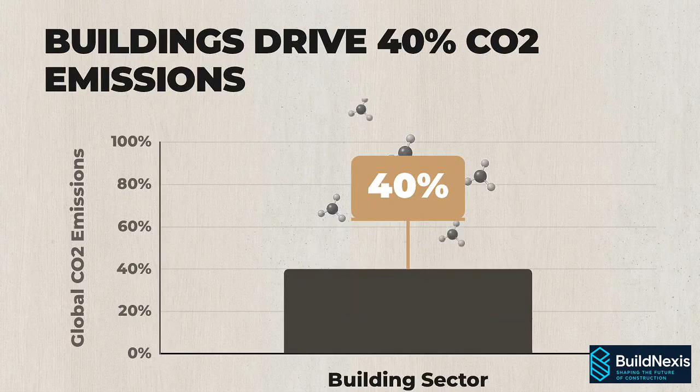The global building sector currently generates nearly 40% of energy-related CO2 emissions. To meet strict decarbonization targets by 2030, the industry is transitioning away from concrete dominance toward biogenic materials, specifically high-rise mass timber. Scaling timber structures up to 10 or 15 stories is a solved engineering problem.

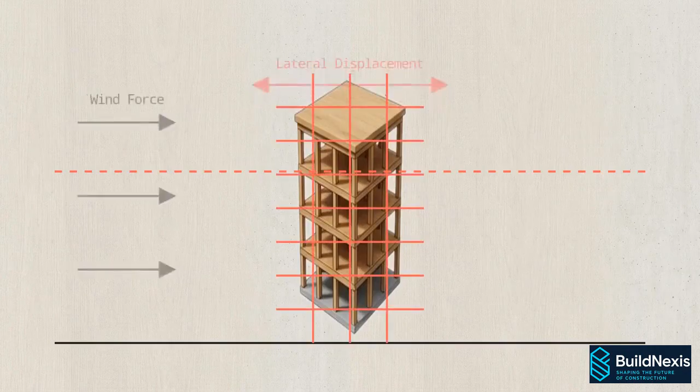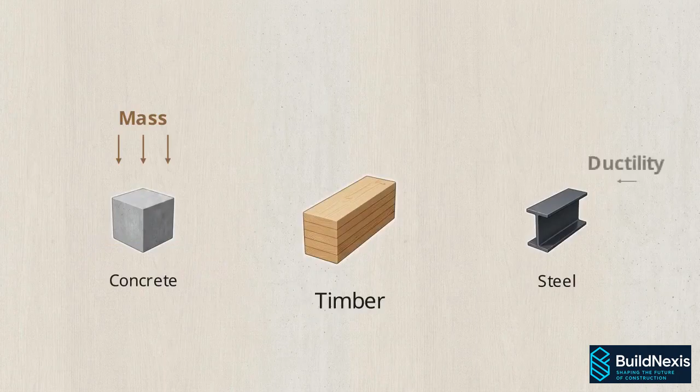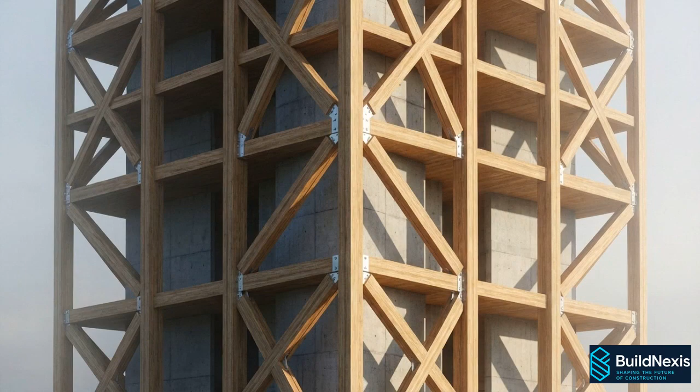However, pushing engineered wood past the 70-meter vertical threshold breaks standard structural assumptions. At these altitudes, engineers are constrained by the physical properties of wood. Timber lacks the extreme compressive mass of traditional concrete, and it does not possess the high ductility of steel. Reaching 80 meters and beyond requires abandoning pure timber topologies. Instead, structural engineers rely on highly optimized hybrid systems to manage forces that traditional wood framing cannot handle alone.

The 86.6-meter Ascent building in Milwaukee stands as the current height record for this hybrid approach. By utilizing approximately 7,200 cubic meters of engineered wood, the Ascent Tower acts as a massive carbon sink, sequestering roughly 7,200 metric tons of CO2 equivalents over its service life.

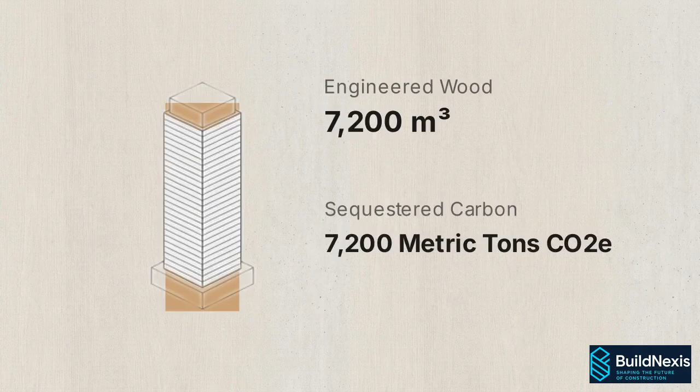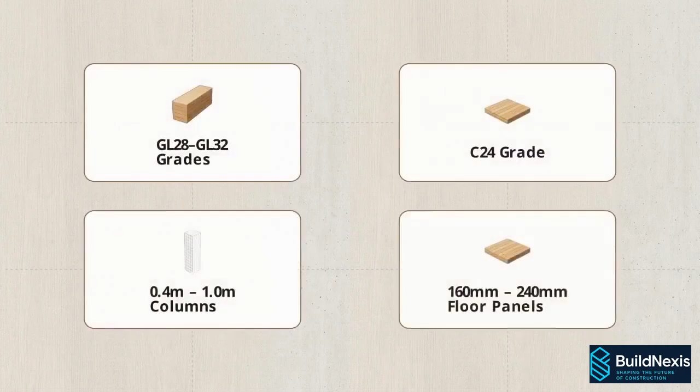In Norway, the 85.4-meter Mjøstårnet tower provides the primary structural counterexample to Ascent's design. These records are corroborated by other regional case studies, including the 84-meter HoHo Tower in Vienna and the 73-meter HAUT in Amsterdam. By dissecting the structural data from these specific towers, we can extract the new universal benchmarks for high-rise timber engineering. Sustainable density results from re-engineering how existing biogenic materials handle lateral loads and fire physics at extreme altitudes.

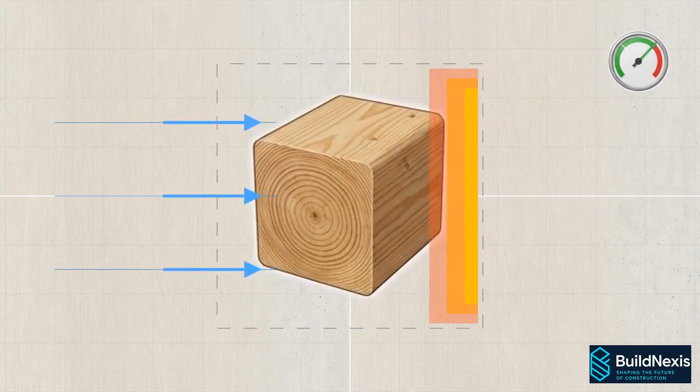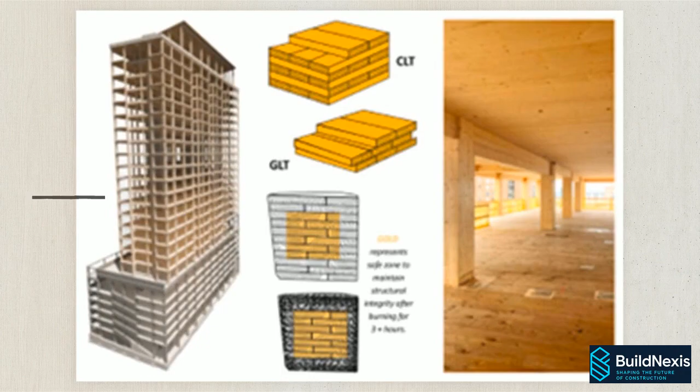The core aerodynamic problem with tall timber is a matter of mass. Wood's high strength-to-weight ratio allows it to perform exceptionally well in seismic events, but its low dead mass makes tall towers highly susceptible to severe wind-induced sway. Ascent's baseline solution identifies the dominant global model for tall wood, the hybrid RC timber system. In this model, gravity loads are handled by a glulam post and beam grid paired with one-way spanning CLT slabs.

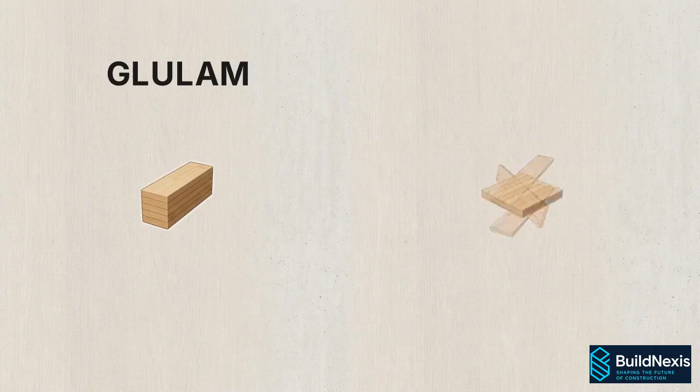Glulam, or glued laminated timber, is an engineered product made by bonding layers of lumber together, while CLT, or cross-laminated timber, consists of wood panels glued at right angles to maximize rigidity. While the timber manages gravity, lateral stability is strictly outsourced to the central reinforced concrete, or RC core, which houses the building's elevators and stairs. HoHo Vienna mirrors this methodology, docking a prefabricated timber structure directly to a rigid concrete spine to prevent wind deflection.

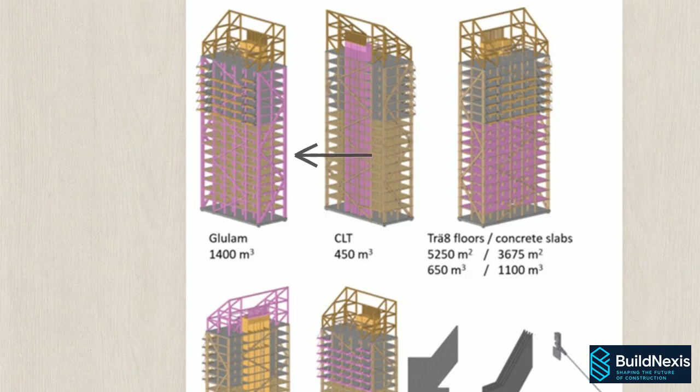Mjøstårnet, however, proves that a timber-dominant lateral load solution is mathematically possible. Instead of relying on a central concrete core, Mjøstårnet's primary load-bearing system utilizes massive perimeter glulam trusses to maintain structural rigidity. These exterior diagonal members are engineered to resist both horizontal wind shear and vertical gravity forces simultaneously. To achieve this autonomy, the dimensions must be scaled. Mjøstårnet's corner columns reach a cross-section of 1485 by 625 millimeters.

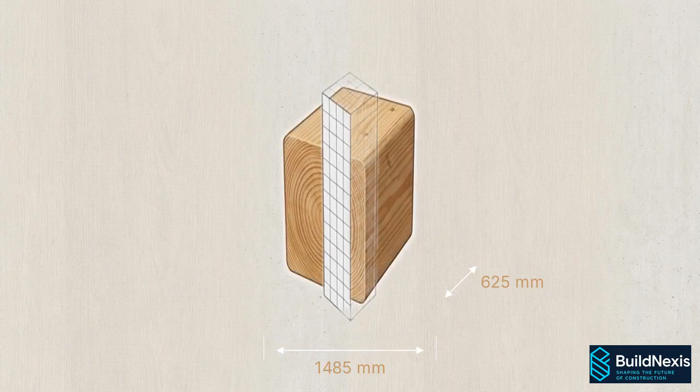Even with trusses of that size, high-altitude sway remains an issue. To solve it, engineers introduced a concept known as mass injection. For floors 12 through 18, the design abandons timber decks entirely, replacing them with 300mm thick composite concrete slabs. This top-heavy mass acts as a dampener, stabilizing the structure's weak axis to eliminate wind-induced vibration and meet habitability comfort criteria.

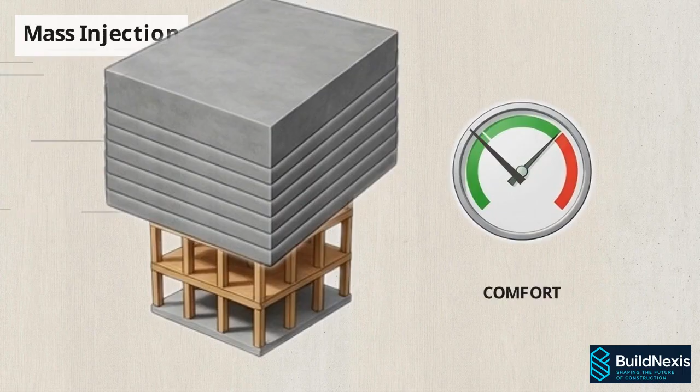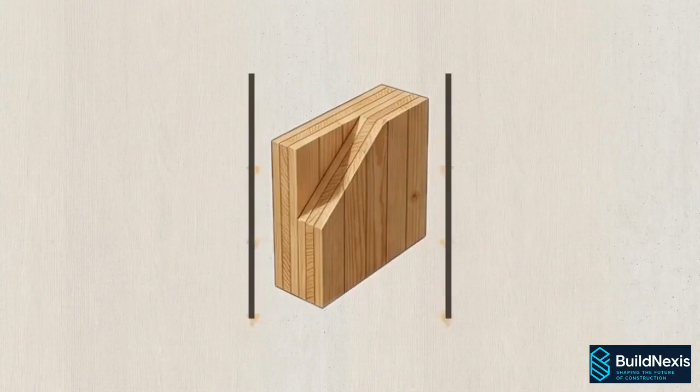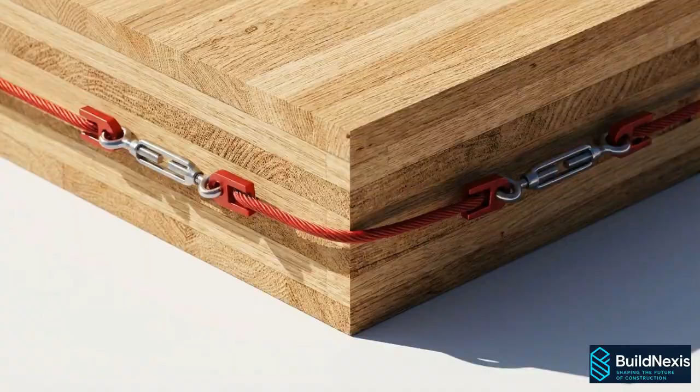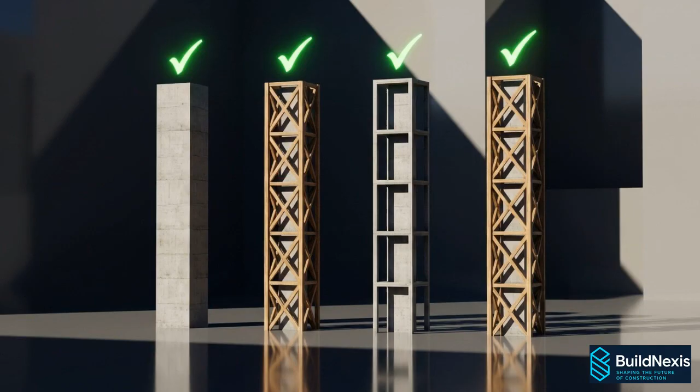In Amsterdam, the HAUT tower uses CLT shear walls reinforced with a steel tension ring that runs the height of the wall to transfer diaphragm forces. Securing lateral stability 80 meters in the air requires either a concrete core, massive exterior timber trusses, or composite tensioning. Structural engineers manage high-rise timber as a composite discipline, using concrete and steel to strategically compensate for the material's lack of mass. Across all 4 benchmark projects, the material specifications have converged into a consistent, reproducible global standard.

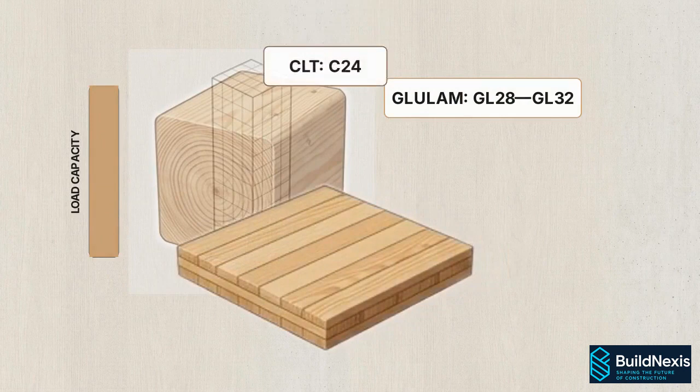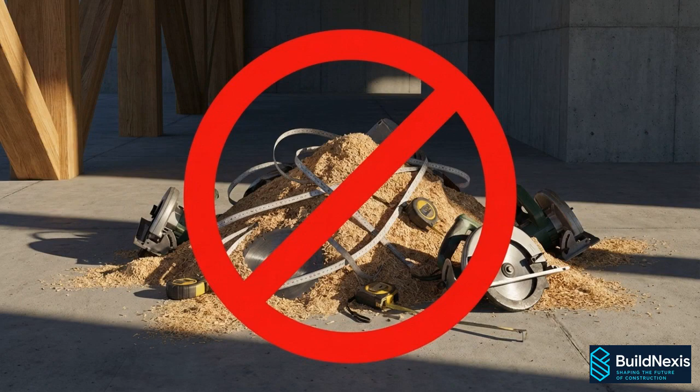The data shows a strict baseline. High-strength glulam, specifically GL28 to GL32 grades, is used for load-bearing columns, while C24 grade CLT, ranging from 160 to 240 millimeters thick, is standardized for floor panels. Erecting an 80-meter tower out of these materials introduces a severe logistical hurdle, the complete elimination of on-site cutting or modification. This requires off-site CNC machining.

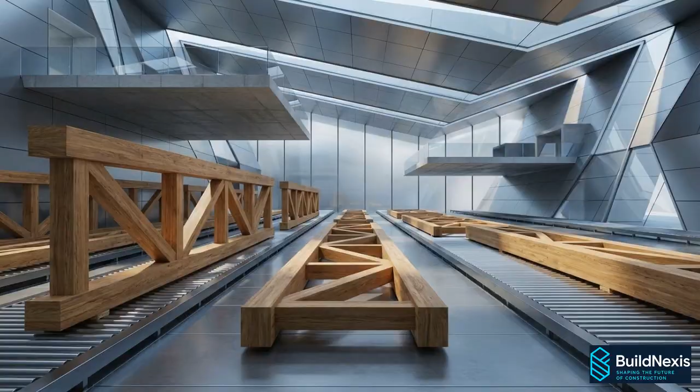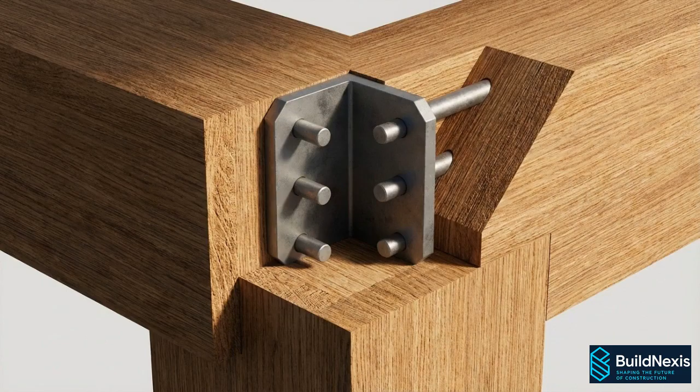CNC stands for Computer Numerical Control, a process where pre-programmed software directs factory machinery to carve wood with extreme accuracy. This industrial prefabrication shifts labor from construction sites to controlled factory floors. Looking closely at the micromechanics of these joints, the beams are secured using internal slotted steel plates, combined with acid-proof steel dowels. These steel connections are deliberately hidden within the wood envelope. This placement protects the steel nodes from environmental moisture and insulates them from intense heat in the event of a fire.

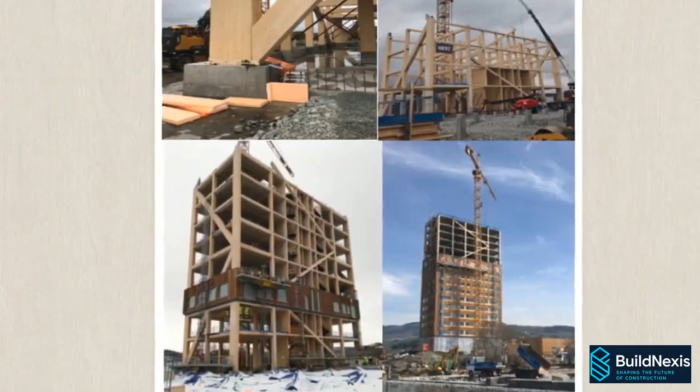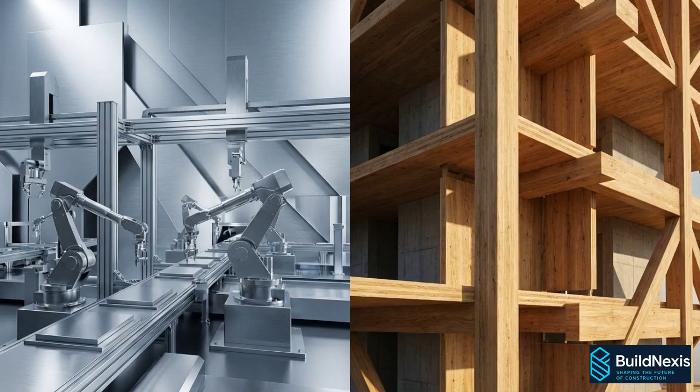Because of this internal hardware, the required tolerances are absolute. Every structural beam arrives fully processed and must fit to the exact millimeter on the first try. The Mjøstårnet project data provides the ultimate proof of this efficiency. Out of hundreds of massive glulam components delivered to the site without any prior factory trial assembly, only a single diagonal piece failed to fit perfectly. Modern timber construction functions as a high-stakes manufacturing process, where structural integrity relies on zero-tolerance alignment.

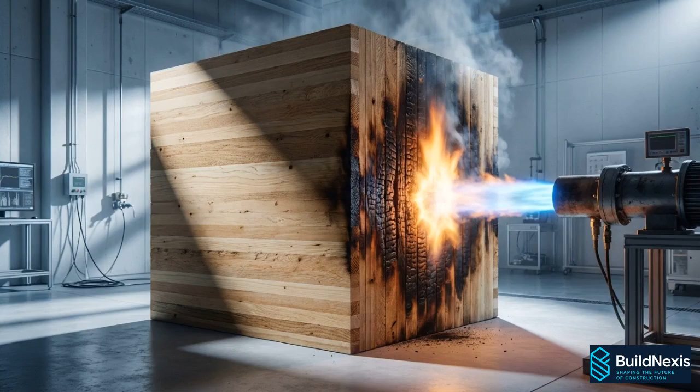All of this precision raises a professional paradox. How do buildings made entirely of combustible fuel achieve legally mandated 2 to 3 hour fire ratings? Untreated wood exposed to severe heat reacts immediately, blistering and degrading. Fire safety relies on managing how the material burns, rather than attempting to prevent ignition entirely. Instead, engineers rely on the material's primary structural defense strategy, sacrificial charring.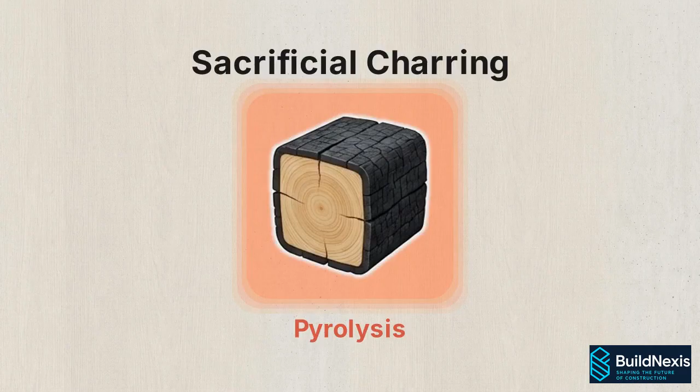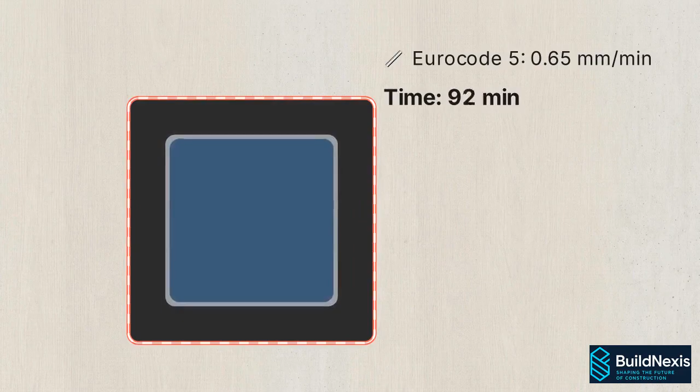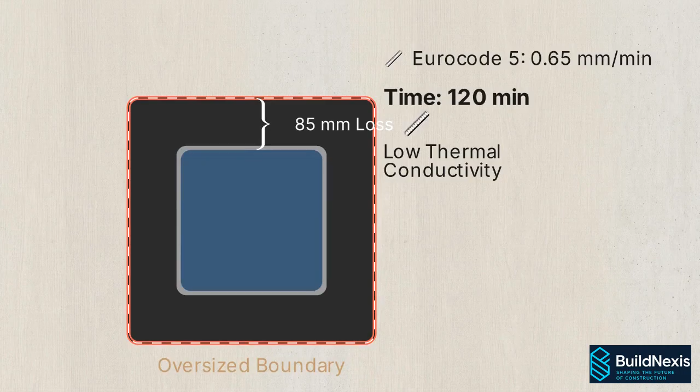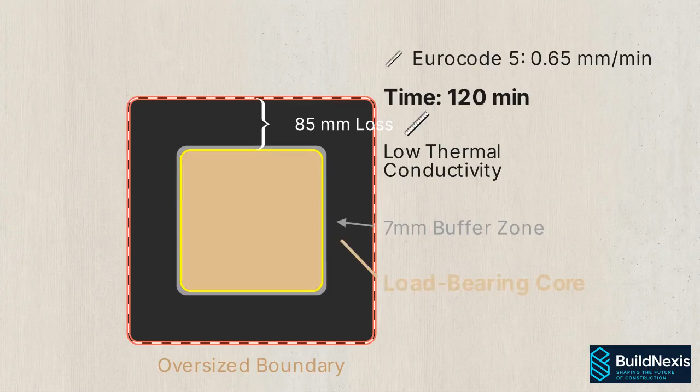Softwood glulam undergoes pyrolysis, the thermochemical decomposition of the wood at high temperatures, at a highly predictable rate. According to Eurocode 5, this notional charring rate is approximately 0.65 millimeters per minute. The resulting layer of black char has exceptionally low thermal conductivity. It acts as an insulating, fireproof blanket that protects the unburnt interior wood from the heat of the flames. By calculating this burn rate, engineers intentionally oversize the structural members to account for the exact section loss, while adding a 7 mm zero-strength buffer zone just behind the char layer.

After 120 minutes of fire exposure, a Mjøstårnet column loses roughly 85 mm per face. But because of this sacrificial oversizing, its unburnt core safely carries the building's full load without buckling. This strategy is supplemented by encapsulation. In the HoHo Vienna Tower, the upper facade is wrapped in non-combustible fiber cement panels to prevent exterior fire spread between floors. Fire safety in timber high-rises embraces the material's combustibility, mathematically weaponizing its predictable charring properties to create a verified structural defense.

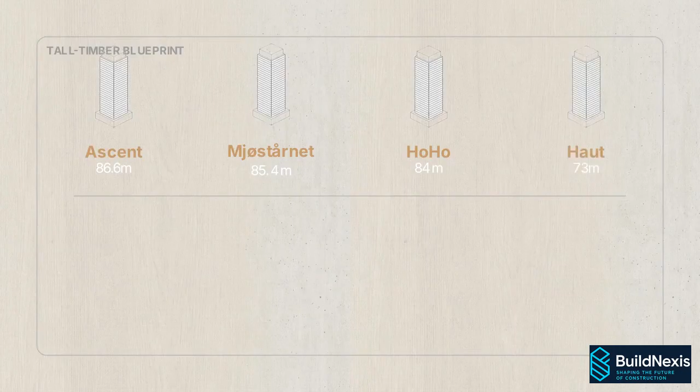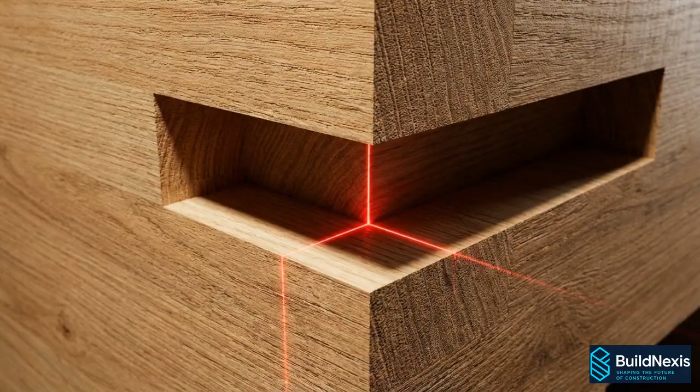Pulling the data points from Ascent, Mjøstårnet, HoHo, and Haut gives us the definitive tall timber blueprint. This method operates as a highly optimized hybrid discipline, utilizing concrete cores for sway control, hidden steel nodes for joint security, and CNC manufacturing for absolute tolerance. By mastering all of these unique benchmarks, engineers are slowly shifting timber toward greater structural autonomy in the vertical landscape. These landmark towers act as definitive proof of concept, providing hard data to satisfy performance-based design codes globally. The measured performance of these towers confirms that the carbon-negative skyline is a buildable reality.